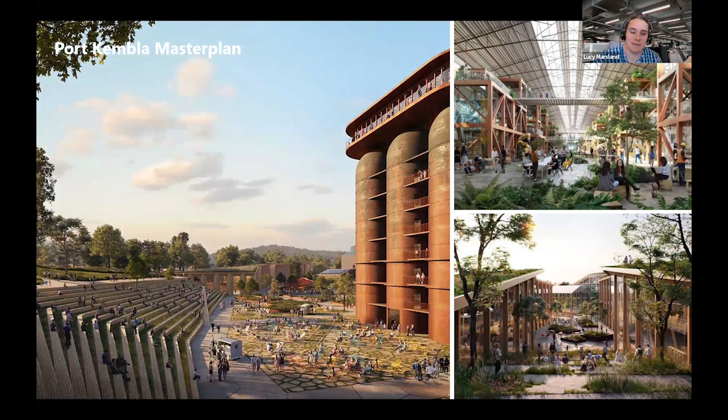As Stephanie said, both Ed and I have a background in structural engineering, although Ed has taken his expertise much further than me. Ed will discuss material opportunities and approach in projects, and I'll conclude with some of the key lessons we've learned and thoughts to take forward. Thanks, Ed. We'll use some case studies throughout to share some of those lessons learned. Thank you, Ed.

So we named our presentation Carbon and Circularity in Our Built Environment. And I always start my projects and our discussions reminding us that as designers, the biggest impact we will have in our lives is the projects that we deliver. And often we are focused on the upfront, the delivery of these projects. However, in order to have a truly impactful shift in how we think about sustainability, carbon and materials, we need to look at the whole life of our projects beyond when we maybe step away from them directly.

So it's the materials phase through use and end of life, and hopefully into second, third and future lives of our projects. And when we're thinking in this whole of life way, at the basis, as a life cycle assessment practitioner, what I'm thinking about is the things that enter in, the resources that enter our project's scope, and the emissions that leave, whether those are the greenhouse gas emissions or the waste or material outputs that leave our projects. And so that actually at the end of the day is what we're talking about when we think about material sustainability, is that simple flow of materials, that flow of energy into a building and seeing that building as a system and an interaction with its context.

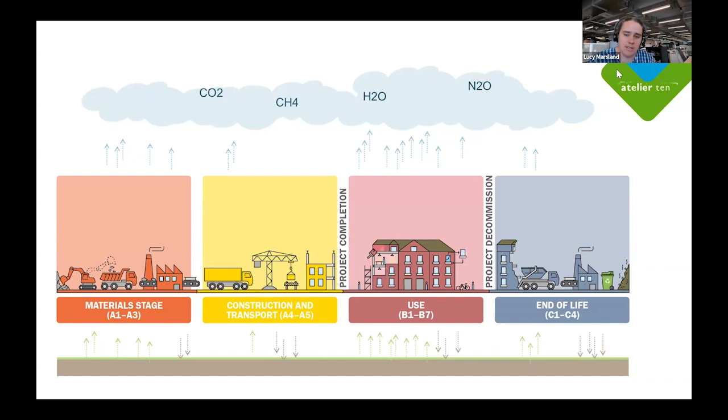Thanks, Ed. Over the last few years in sustainability, the focus really has been energy efficiency, operations and electricity as operational carbon. But in fact, looking currently and into the future, the biggest impact on greenhouse gas emissions and the resultant global warming potential is actually the delivery and construction of buildings, which happens on day one of each project.

So year on year, the delivery and construction of projects, those associated emissions go straight up into the atmosphere, versus the cumulative operational emissions that grow over time. That's why structural engineers have gotten a bit more spotlight in the discussion around sustainability in recent years, as the industry has shifted to a more holistic and broader understanding of carbon and that elusive, ever discussed net zero or carbon neutrality.

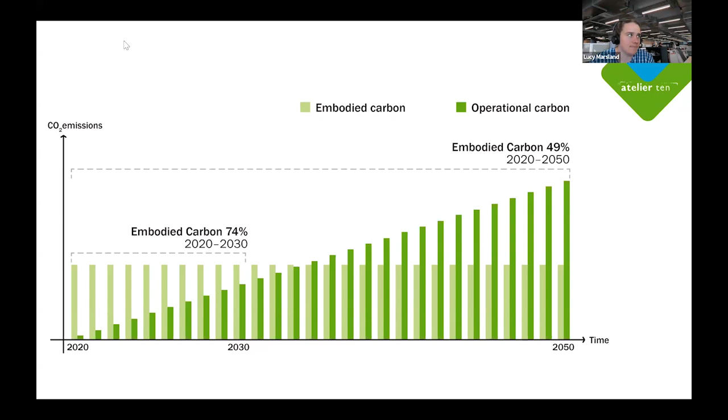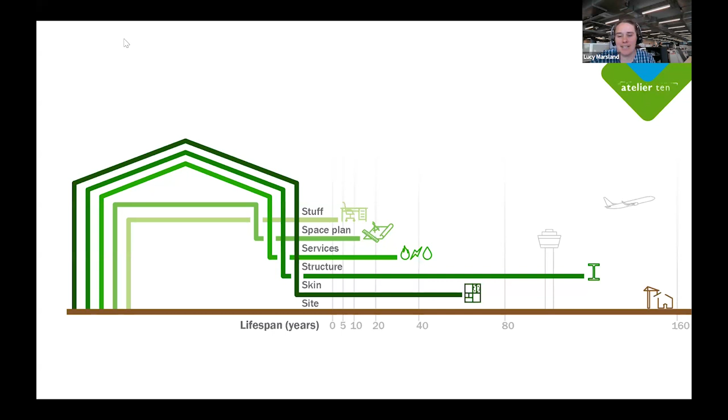Thanks, Ed. So if we focus on embodied carbon, we're talking about the materials in delivery upfront, and then throughout the life as those materials require maintenance. They need to be looked after, they need to be replaced at the end of their service lives, and they need to be dealt with when they leave the site boundary. So it really opens all members of a project team to contribute to this discussion, not just our energy-focused people, but the whole team. And we know that architects are a pivotal leader and contributor to any design team.

Thanks, Ed. Now, I never give a presentation without showing this graph, and I'm sure plenty of people have seen it before, however I will keep showing it. This image comes from an international standard, EN 15978, and my dream is that we can use this language of life cycle stages as easily as we use design stages, like schematic design, design development, construction. So when we talk upfront, we mean A stage, product through construction, B stage being the use of the building, and C stage towards the end of life, and D beyond. So I will keep hashing that language. I'm sure some people know it inside out, but I do think it's really critical that literacy of sustainability is embedded across all members of industry.

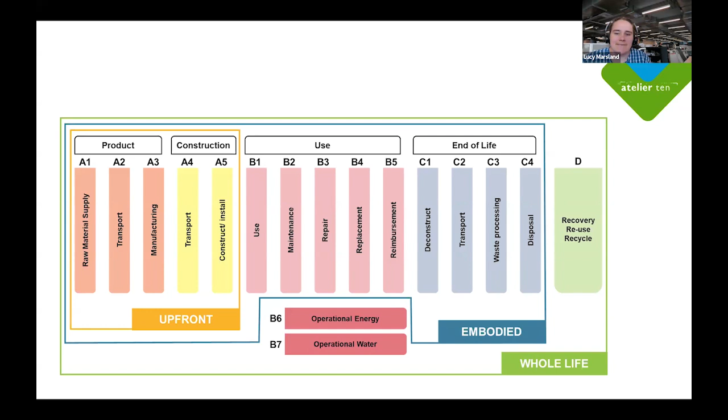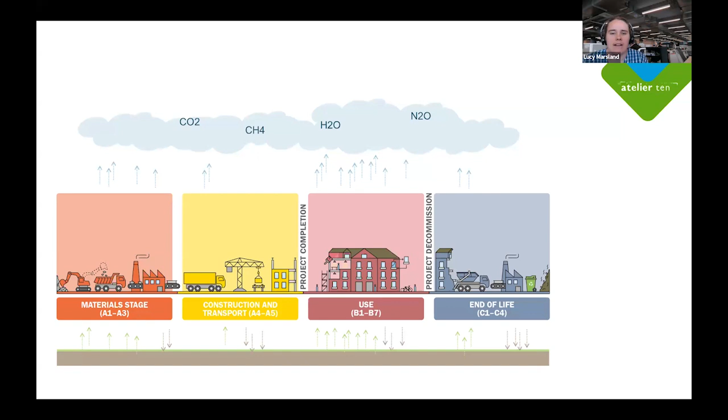Thanks, Ed. So if we apply those life cycle stages to our projects, what we see is that business as usual is a linear process through materials, construction, use, and end of life. But where we want to get to is something much more sophisticated, where reuse, recovery, the adaptation of buildings, and a circular way of thinking about these assets comes in. We use the word assets for buildings quite often, but I don't know if we always see our existing buildings as design assets - utilizing what we have to undertake our professional projects with a greater sense of regeneration and stewardship of our built environment.

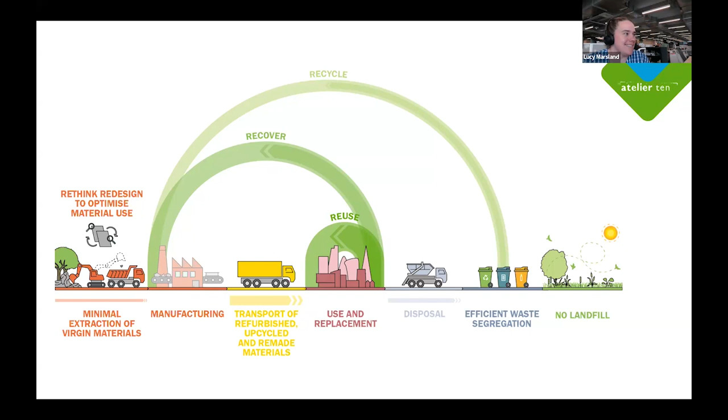So how are we going to get there? This is what Ed's about to dive into from the perspective of a structural engineer. Those design decisions we make as a team upfront, we always have to start with using less stuff. What assets do we already have? What materials do we already have? We'll really focus this conversation on using less stuff, and we'll leave the specification and product certification discussion to others. So I'll pass over to Ed to share the structural engineering perspective on using less stuff and using the stuff we have.

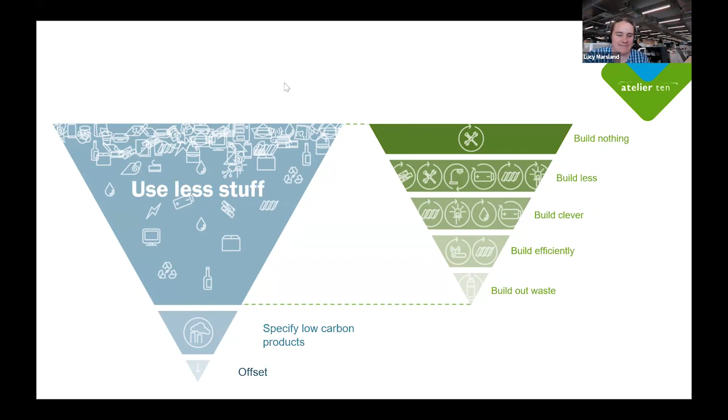Lucy, appreciated, and thanks to the RAIA for inviting me today, and Lucy, I'll dovetail with her sentiment. So just to hammer home Lucy's point, we've got the life cycle diagram, I think, for the third time, but it's just how the structural engineer looks at this diagram and our touch points with it. So we have the A1 to A3 phases, and that's where structural engineers as a discipline can come in and look at material selection and ways to incorporate lean design to reduce the amount of material mass.

We have A4 to A5, which is a very complex phase - that's the construction stage, there's a lot of moving parts. At Robert Bird Group, we're heavily involved in this phase, and we know firsthand that the temporary support of infrastructure projects, long span roofs, more complex structures can be significant in terms of embodied carbon, and in some cases could be 30 to 40% of the permanent work. So it's not something to be ignored.

We then have the operational phase and maintenance, and that's where, as a structural engineer, we come in and look at restoration and potentially a change of use. Adaptive reuse is a bit of a buzzword at the moment, which obviously talks to that. And then we have at the end of life the demolition phase - that's where we look to incorporate circularity. Historically, it's been cradle to grave, but we're looking for more of a cradle to cradle mindset, looking at our existing assets as material banks and really trying to close the loop.

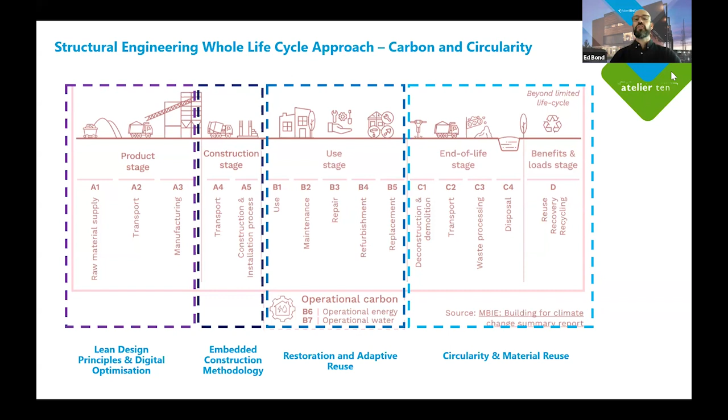The structural engineer does have a relatively large impact on our assets. It could be 50 to 60% of a building's primary structure embodied carbon, and if you throw in facade, that's up at over 60%. On heavy infrastructure projects, say a station box, numbers are up at 80, 90%, all attributed to primary structure. That's why the graph suggests the influence of the structural engineer is large, and the earlier the engagement in a project life, the better - that's where we can have the most meaningful impact.

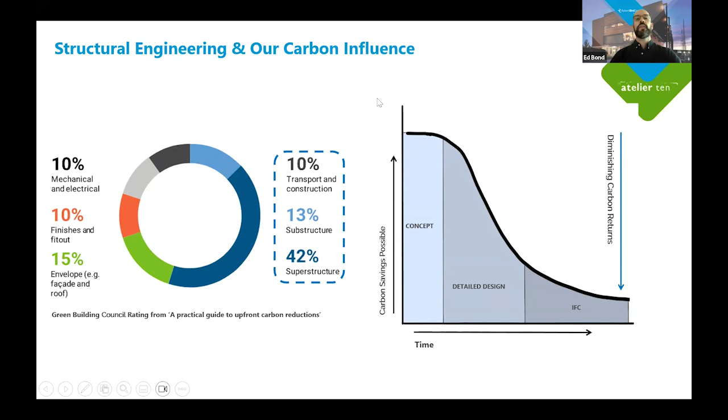On the screen we have the 3 R's. Firstly, we want to reduce the extent of our buildings as much as possible. If we are going to introduce new elements to the building, we'll try and reuse. Reuse avoids landfill and also takes advantage of the spent carbon. Below that we have recycling, which once again avoids unnecessary waste and reduces carbon, but not to the extent of reuse.

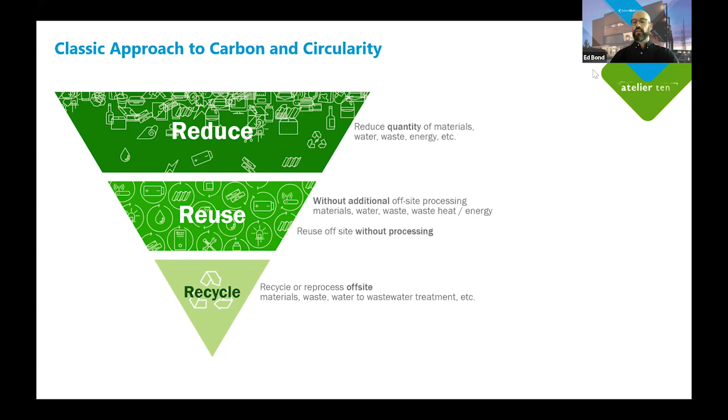So we've run with the 3 R's, and we've got the 10 R's on the screen. We have restore, just near the top - that's ongoing restoration, the maintenance I spoke about earlier, extending the existing asset's life. Then we have repurposing, where the adaptive reuse theme could come in - it could be vertical or horizontal extensions, strengthening of the structure, typical floor plates to enable that change of use.

We loop back to reduce - it's important that we firstly reduce the floor extents as much as possible. Once we've done that, we set sensible column grids, tighter really the better, and try to avoid unnecessary transfers. Once we've got a clear definition of the building extents, we can start refining. This is where some of the new technology coming through is very useful - computational design and digital scripting come into play, and we can refine our material further.

Then we've got reuse and recycling, which we've spoken to. And below that we have redefine, so we can redefine our material specifications, which is looking at low carbon options and replacements.

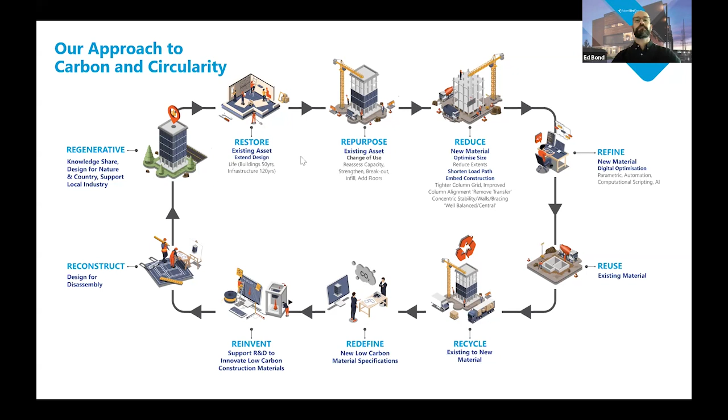Continuing then with the theme, we have a brownfield site here with an existing asset on it. In this particular case, you can see Battersea Power Station, which is a famous adaptive reuse project. But really, the starting point is just looking after our buildings, applying TLC, and if we have regular maintenance regimes, could be every couple of years, we can prolong the life of our asset indefinitely. Ultimately that reduces the planetary harm, the carbon spend, and it's the best overall outcome.

More often than not, we're not doing that, and we are maybe waiting till the end of a particular cycle - could be a tenancy cycle, or waiting till the end of 50 years in buildings, or over 100 years in infrastructure. Then we're trying to restore the materials. That results in more additional materials being required, and we might need to strengthen. In some cases we need to remove the existing assets - that's where reuse comes into play, and that reduces the planetary impact.

So recycle then falls underneath that, and lastly, and up until recently it's been our default position - that's demolish and landfill. From what I understand, there's some estimates that the construction industry is responsible for 80% of global landfill. It's clearly not sustainable, it's affecting our ecosystems, and it's something we need to move away from.

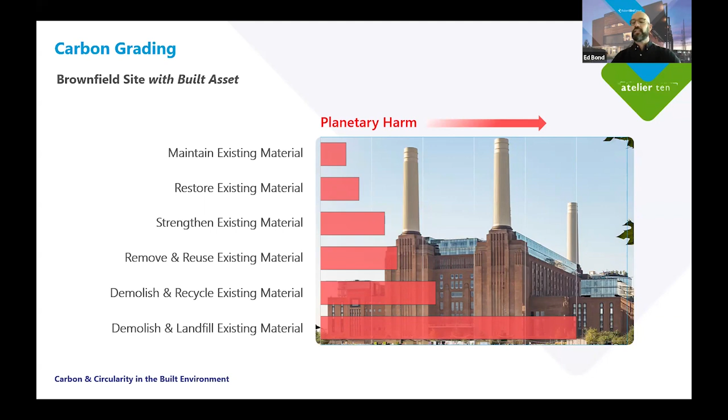We're not always going to have an existing asset to work with and a previous carbon spend. So this next example looks at a greenfield site, or it could be a brownfield site with no existing asset on it. There may be an opportunity with a site strip to reuse excavated materials. And other than that, we can look at nearby sites and reuse and recycle materials.

And then we move on to adoption of materials with hopefully lower energy intensity. If we look at the business as usual case, things like cement, which is formed from clinker, we have high energy intensity, and without a decarbonised grid, we have high carbon.

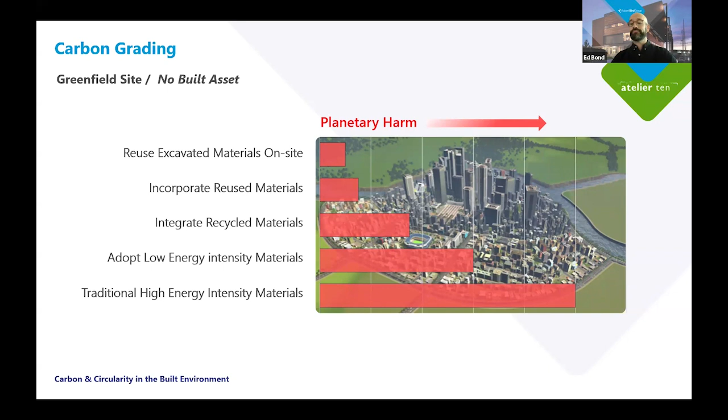I mentioned earlier about regenerative design, and here are some headlines from the Institution of Structural Engineers. We've got firstly designing for place, so understanding the local context in terms of society, the people there, respecting nature, working around it, and also construction techniques.

We have circularity and reuse, so me and Lucy have just been talking about the benefits of that. We have material choices, choosing materials that may be available locally and dovetail well with local construction practices. And we have knowledge transfer.

So I feel privileged to be on the call today to share my thoughts. And we ideally need to scale this down and up and have as many conversations as possible.

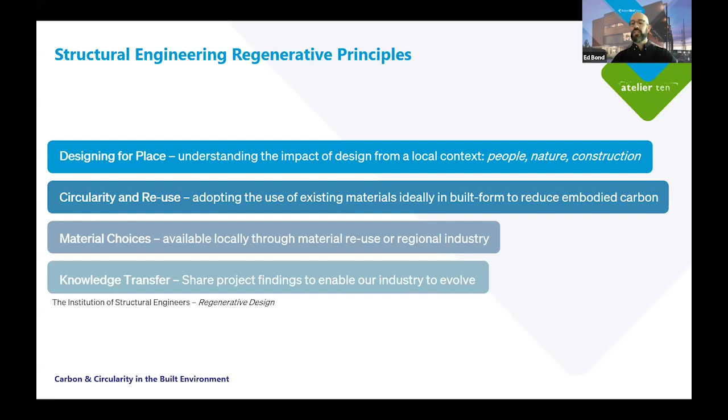Just jump onto a case study here. This is a temporary office for Sydney Metro.

Fabrication embedded circular principles in terms of understanding the fabrication process. Stock lengths were available to reduce the amount of fabrication and waste, and embedding elements of DFD, which I spoke about earlier, designed for disassembly, so bolted connections, and CLT panels, floor panels that can be removed at a later date when the building's repurposed for its second life, and potentially more lives beyond that too.

So at this point, probably just in terms of some metrics, give you an idea of the benefits of recycling and reusing. We take steel here, hot rolled steel. We can see the Australian default position. This is the NABERS data that's just come out.

Results in a large embodied carbon dump on the planet, and that's linked mainly to the fossil fuels used in the basic oxygen furnace. It's coal, and you can see it's significantly more here than the European average, and that's mainly down to the infrastructure that's available within Europe, and some of the processes that have been in play for a longer period of time.

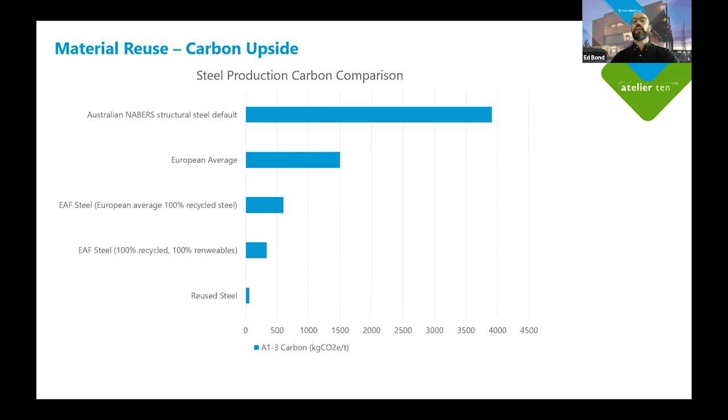Now, that's definitely going to improve over the years to come, and the secondary or scrap steel may make up 40 to 50% of our total steel production, but we're still going to need to produce primary steel. And there are some developments. DRI is a process that is under R&D at the moment, but in terms of it being scaled out, it's likely a couple of decades away.

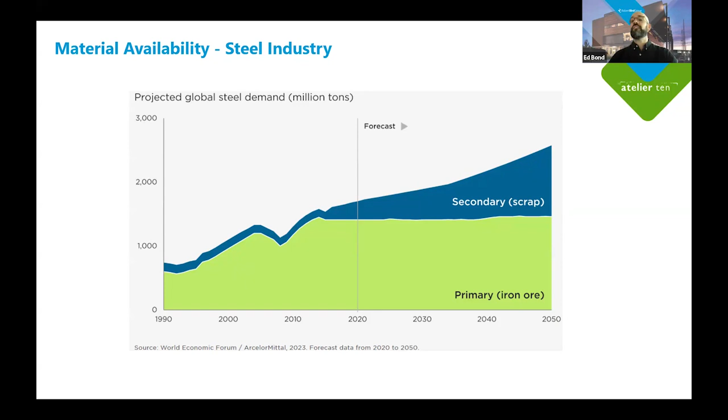So we've also got to be aware of the challenges that come with changing the infrastructure, and also the cost as well that comes with electric arc furnace. It's a good example: BlueScope at the moment relining their blast furnace, and relining alone is $1 billion. So the steel industry and some of the industries trying to tweak and adjust that infrastructure needs ideally investment at potentially government level.

Another material that's been spoken about a lot in sustainability circles is mass timber. That can sequester carbon. There's no doubt, similar to steel, it can really help us move towards this net zero goal that we've set ourselves by 2050. But as everyone's aware, there are some things that are out of control when it comes to actually harvesting sustainable timber. One recent example were the bushfires we experienced in Australia.

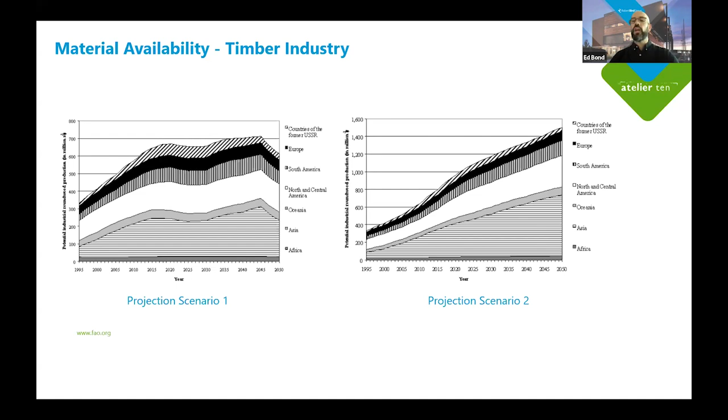You can see there's two projections here. The one on the right is more positive in terms of extra timber that we're going to produce over the next 20 years, maybe an extra 40%. But you'll see from the next graph that due to the explosion, you could say, in our built environment, we need a lot of additional floor area, and reused materials and maybe mass timber on its own isn't necessarily going to get us there.

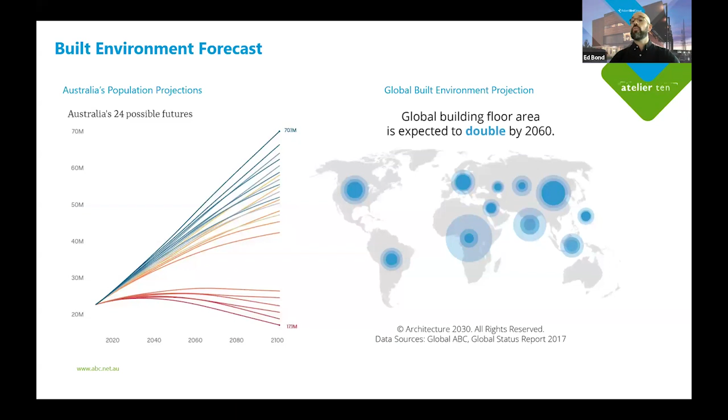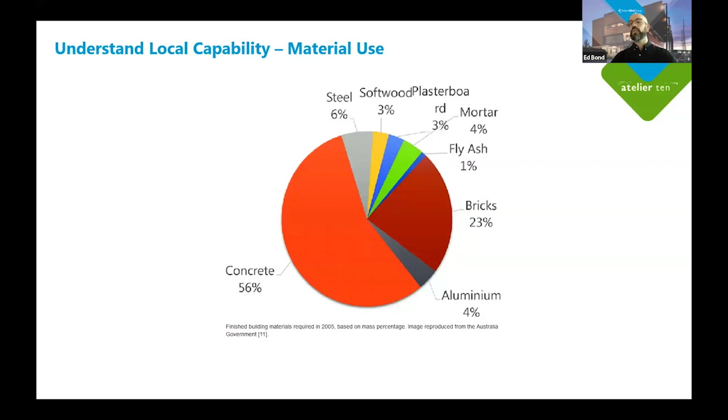This is a graph which, going back to regenerative design and understanding local practices, shows that the lion's share of construction materials within Australia are concrete. And this is where we can celebrate some of the advances from the Australian construction industry. When it comes to concrete, post-tension concrete, Australia is seen as a world leader, and our designs are very efficient. So it's something we can definitely work with going forward when designing and thinking about materials.

If we are going to think of concrete, as I'm sure a lot of people on the call do on their projects, how do we reduce the impact of that material? Everyone's probably familiar with cement replacement: fly ash, which comes from coal, and blast furnace slag, from the steel industry. We also have geopolymer cement replacements. We can recycle steel, and we are actually doing that within Australia. A lot of the reinforcement comes from electric arc furnaces, has a lower footprint, and takes advantage of a decarbonised grid.

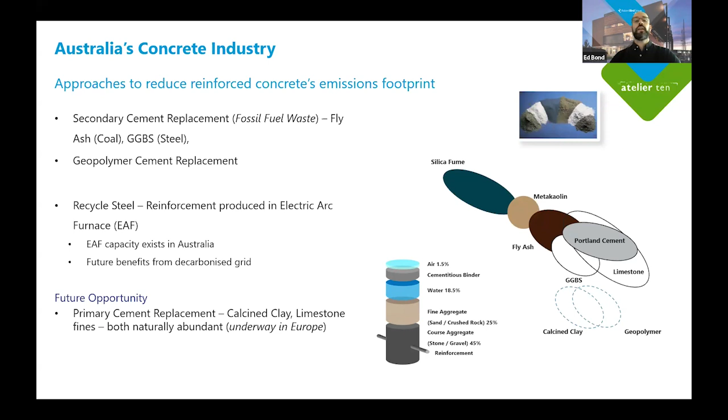And there are future replacements for cement needed, because in the next 10 to 15 years, coal power stations are going to get phased out, so fly ash will be less available. We need to start thinking about replacements. One of those is calcined clay, which is already being used in Europe, and there are studies underway within Victoria on things like limestone fines.

So how do we calculate our improved impact on the planet and lower our emissions? We need to really start measuring carbon on our projects, and a lot of projects these days are undertaken using 3D models like Revit, so we have access to very valuable data.

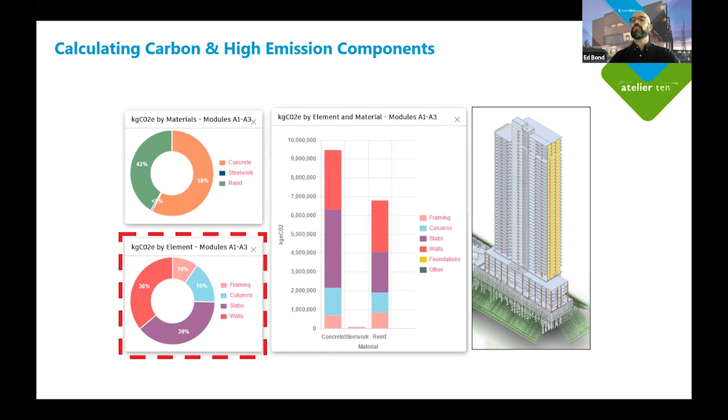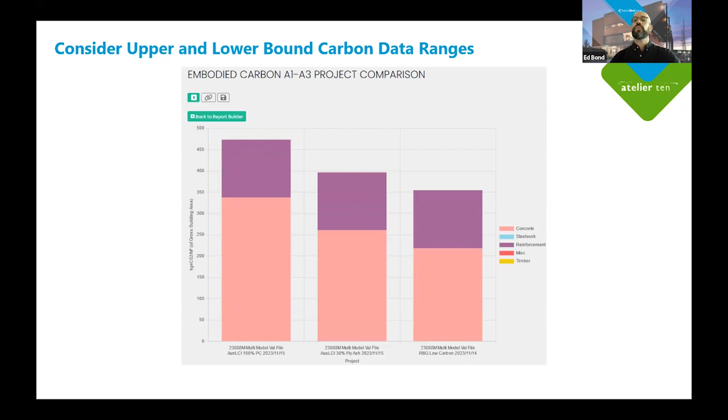Something to add here: when we're looking at carbon, we feel it's always useful to have a range. There's an argument that carbon calculations could be seen as a bit of a dark art, since it's still relatively emerging. So we like to give a range with the different data that's on the market, say EPD versus national averages. In this case, we've looked at a range of national averages versus EPDs.

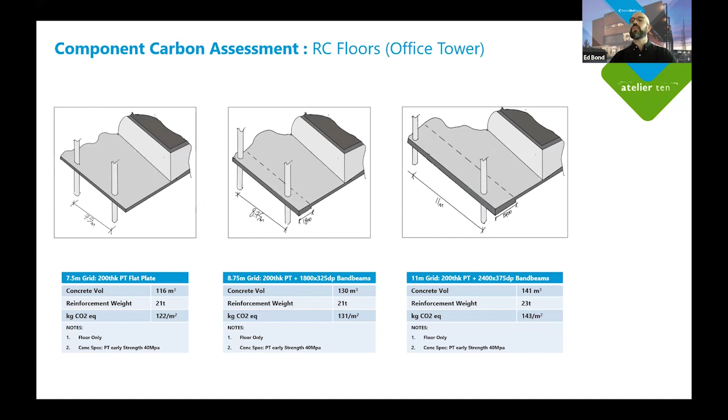But we're also using material quantities such as concrete and reinforcement as a means to reflect cost savings, as well as linking that directly to carbon. That can be a single source of truth when it comes to carbon data, which can vary in some cases wildly.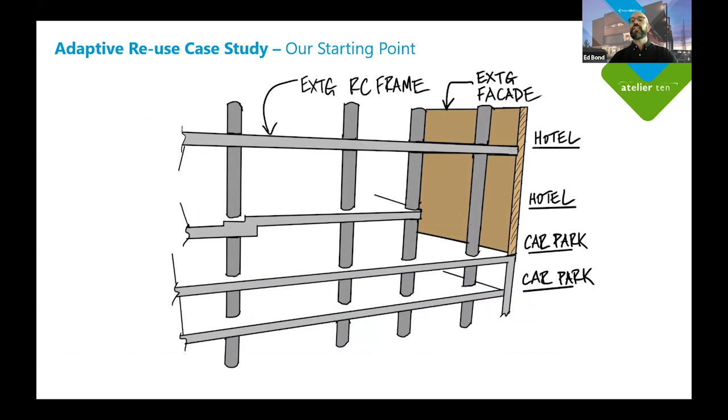Here we have a case of adaptive reuse, with the starting point being an existing hotel that wants to be adapted for a retail conversion. So here we're trying to maximize the building envelope, so we're introducing extra floors. Because we're reducing the clear head height, we've had to take out folds within the slab and replace existing floors and associated carbon, and get the services to work harder.

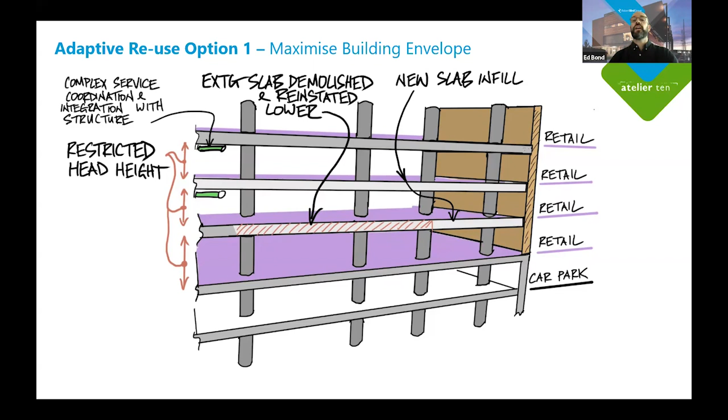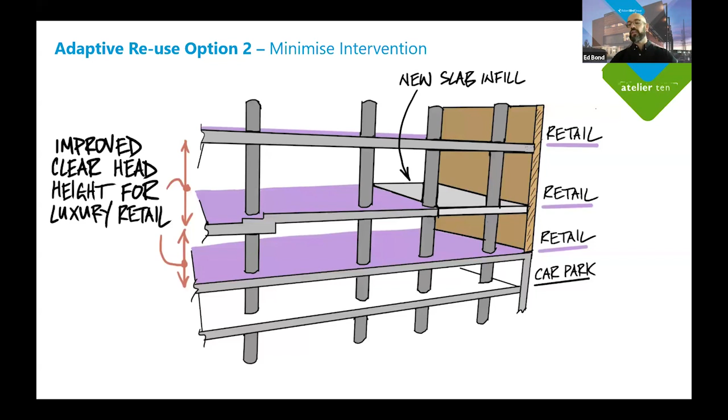We started with this, but the team actually challenged that approach and asked: what if we try to minimize our intervention and add floor where it's needed, but retain the existing structure? One of our conclusions is that improved floor-to-ceiling height actually improves the value of the space, opening up the retail conversion to high-end luxury where there are greater returns. It obviously reduces capital costs, and ultimately it lowers emissions.

So it's a challenge back to the industry at this point: when we're involved in those conversations, to let our clients know there could be a different path to go down, where we look to really minimize work and changes to the structure, and get the most out of the carbon that's already been invested.

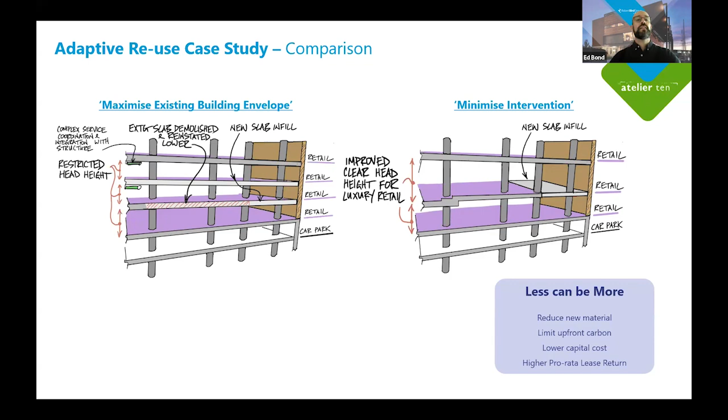Just reiterating the point that if we minimize our floor areas, we minimize upfront capital cost and reduce our footprint. Running here are some of the digital tools at our disposal when it comes to lowering embodied carbon by refining column layouts, which could embed architectural constraints to really slim down our slabs as much as possible.

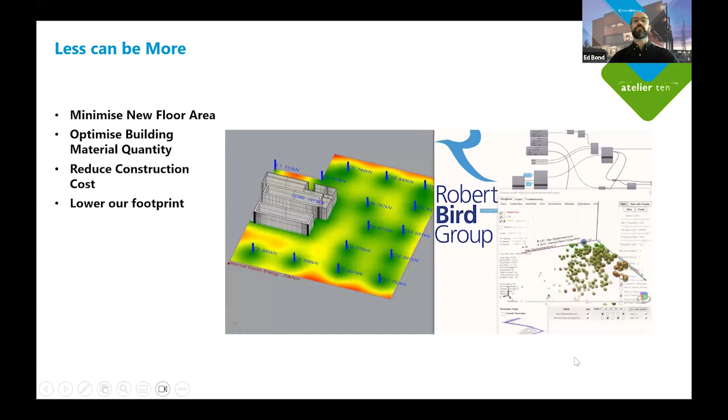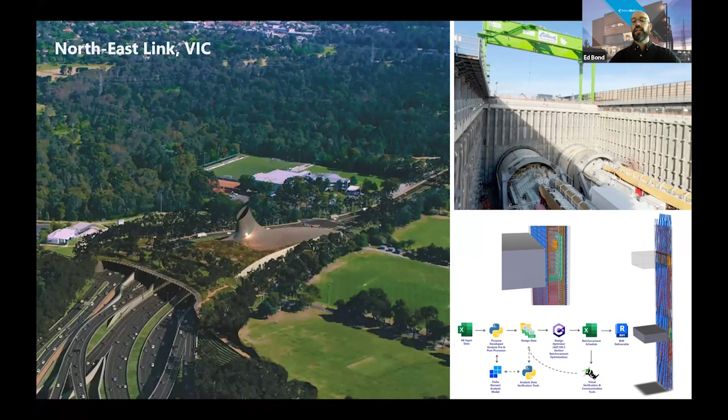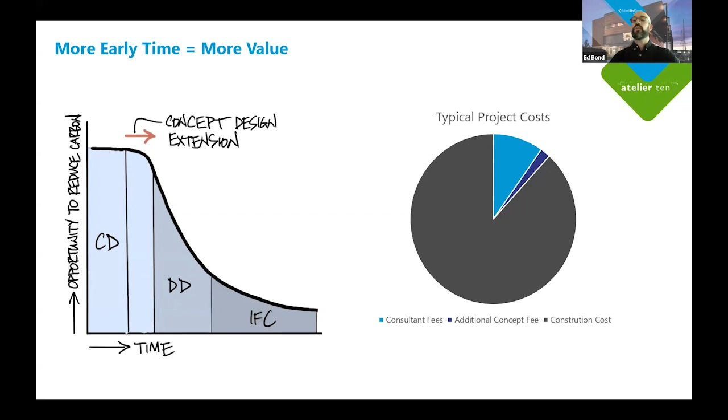I'm getting close to the end of my section, but I'm just throwing this out to everyone on the call. If we can make a substantial impact and difference in those early stages, is there an opportunity for us to extend that period? Yes, that comes at higher fees, but if we can reduce the amount of material volume associated with it, there's direct value from a cost perspective, but obviously we end up with better planetary outcomes as well. So it's something we could maybe consider thinking about with our clients.

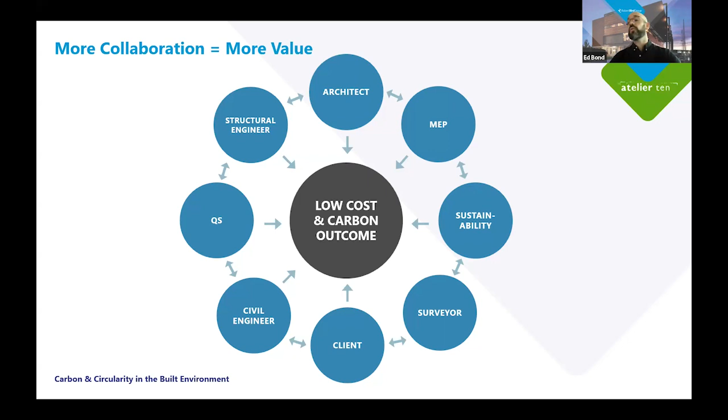Just to finish on: in a finite world, the planet has a capacity when it comes to taking on more carbon. At the moment we're measuring carbon in kilograms of CO2 equivalent per square meter. That's useful for comparing across projects, but when we have these large infrastructure projects, there's a big dump, regionally, nationally, and globally from that. So should we be looking at total carbon instead? And likewise, when it comes to occupancy, could be a residential tower or a single dwelling, do we want to be thinking about caps on embodied carbon? Australia has one of the largest average house sizes in the world, so is that something we need to think about when it comes to reduce, which I touched on?

So at this point, I'll hand back to Lucy.

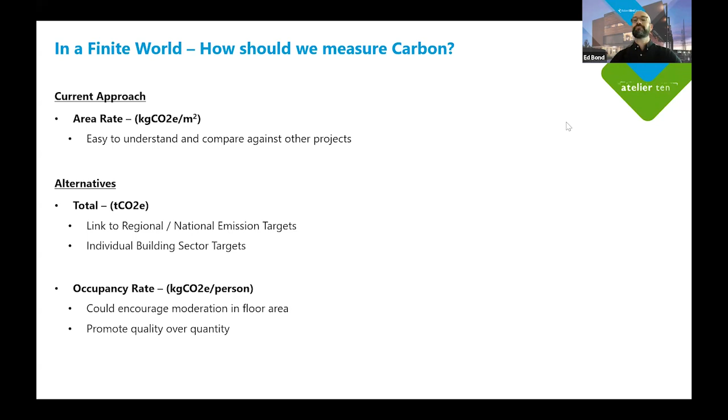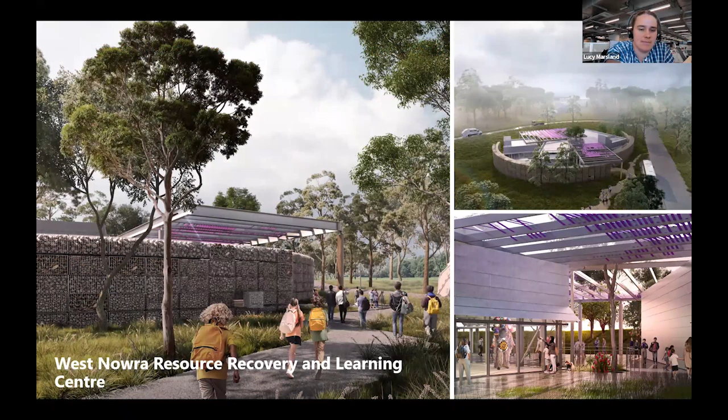Thanks so much, Ed. It's wonderful to dive deeply into the many components of structural design and how that does interface and impact the architecture and building as a whole. I think it's clear from what Ed has described and all those nuances that this is a wholesale change in the way that we think, going from the 3 R's to the 10 R's. I think that lays down a challenge, not just for structural engineers, not just for architects, but for building owners and the whole design team to serve our communities.

We had a lovely project up in New South Wales that really embodies that wholesale regenerative outlook with a circularity focus, and it's in fact a building at the tip. So what better place to showcase the undervalued opportunity of reusing materials. What always excites me about this project with Terroir as the lead architects is the way that circularity and materiality is embedded in the narrative of this place. It's a place for education, for gathering and exploring curiosity, and showcasing materiality really changes the fabric of the experience of architecture, which really excites me and gives a nice contrast to the engineering systems and magic numbers that Ed and I could spend all day looking at. But when we zoom out, the way that materiality can change the narrative of a building is a pretty magic part of the whole story and keeps me coming to work every day.

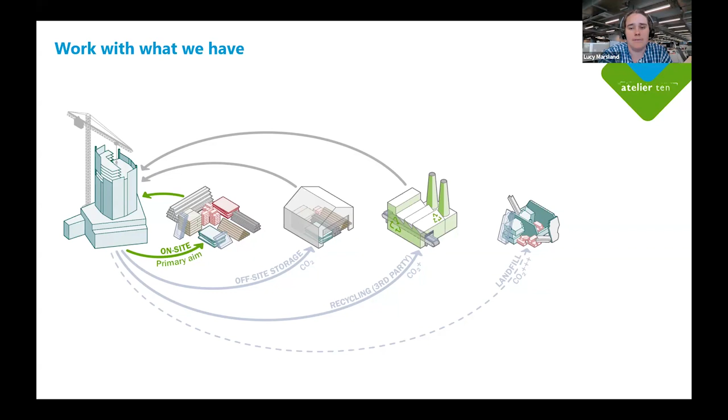There is no silver bullet. I think anyone that sells you a silver bullet, you need to challenge that, and instead build this literacy, build our understanding of our context, both our supply chain and our places. That's the way our projects move forward, with nuance and a holistic approach to circularity and managing our carbon, investing our carbon wisely on every project. The way that's going to get done, as I see it, is about challenging the way we program and model our project delivery. A little bit of extra time at concept design is the biggest opportunity to influence the outcome, at a relatively lesser cost overall for the project.

So it does challenge the way our projects classically get delivered, but I actually also think there's lots of ways this is not that radical. We see it on infrastructure projects, having a project office, having a joint venture. There are examples we can carry over, and I think integrated design is a key part of delivering these very aspirational, ambitious but critically necessary outcomes around sustainability.

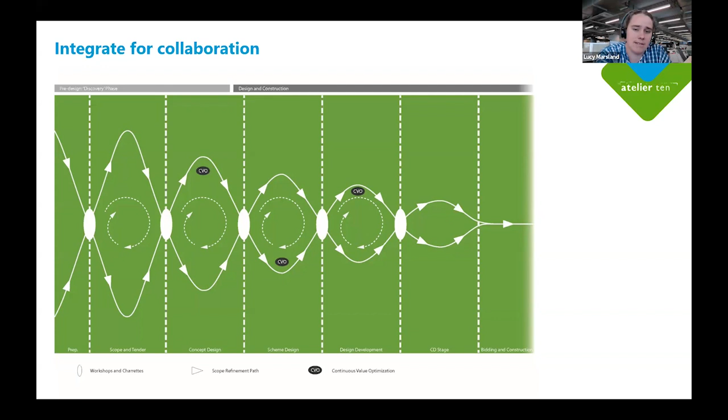And my last slide, thanks, Ed. So if that all comes together, I think we can shift as designers from focusing on just design and getting our building up off the ground to a position of stewardship, where these are communities we serve. To be a designer is to serve a community, as far as I see, and to be stewards of the assets, the community assets and the design assets that are around us, identifying ways that we can leave a legacy as designers, but it's a legacy of service. It's a long life of our assets, and it's one where their future second, third, infinite number of lives can be enabled. It's just our time that we have that we can contribute to this process, bringing our own personal skills, whether those are the structural engineering skills, the skills of architecture, or for me, that life cycle assessment and sustainable design thinking.

So I hope that between Ed and I, we've given you some nuanced insights and some zoomed out reflections on what carbon and circularity's interactions are, what the opportunities are for this place where we are in Australia, and how our projects' model, our program and our teams can really enable that, to improve, invest our carbon, invest our materials, and consider the planet on every project that we work on.

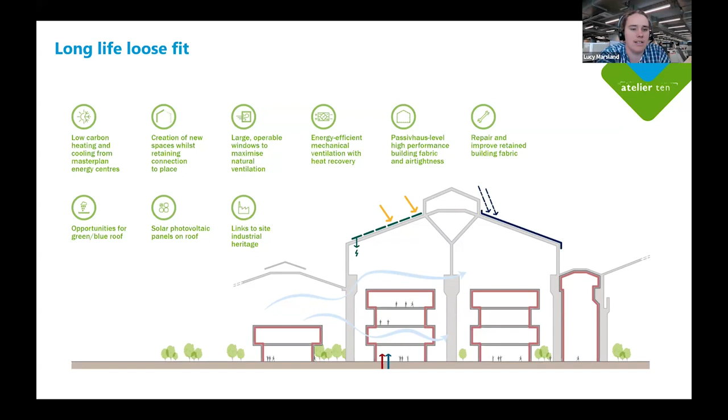Thank you so much, Lucy and Ed, for that fantastic presentation. I think many people would find it incredibly refreshing to hear from two structural engineers that are so passionate about this. And I suppose that leads to a question of mine.

Often as architects, we're responsible for engaging the structural engineers on a project. How do we make sure that they have the capability, but also the scope, to undertake the types of analysis and options testing that you're talking about?

That comes down to the scope. If I'm honest, Stephanie, I think at the moment I'm seeing the industry going in the opposite direction where we're kind of de-scoping. We're chasing, definitely in the Melbourne market, a lower fee, which means less scope. And I really don't think anybody wins, definitely when it comes to carbon and circularity. So I do think collectively, as an architect, we could request that being in the scope as a bare minimum, and if we can explain to our clients the value of that, then I think there could be a movement in the right direction. And likewise, we can also lean on architects as well. If we're in that position of bringing architects on board, and going back to what Lucy was just presenting there, it's collaboration, isn't it?